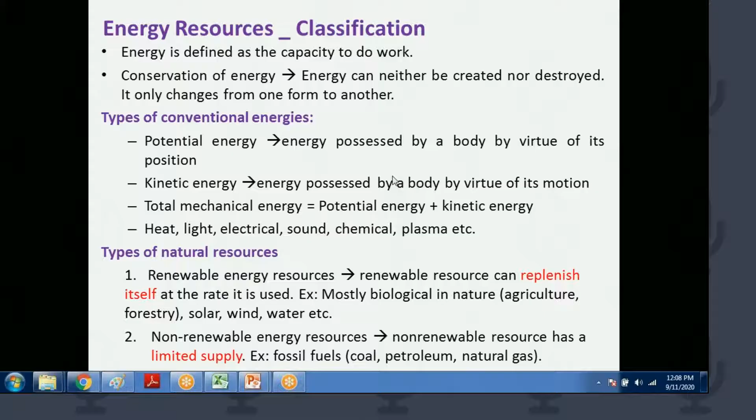Good afternoon for the second session of FDP. You have already listened to many talks, especially on alternate fuels, biodiesel and its production, and the chemistry involved in biodiesel production. Today morning we also heard about the techno-economic scenario of the biodiesel industry. Well-reputed experts from all over India, from reputed organizations like NIT and IIT, have been taking sessions in this FDP. So my topic is not different from them, but we are going to see a brief review about the scenario of renewable energy sources in this session.

We know that time is running out, and soon we'll come to know that there will be nothing left on earth to burn to produce energy, and only earth will be left. That will be the case in future if you don't opt for renewable energy sources.

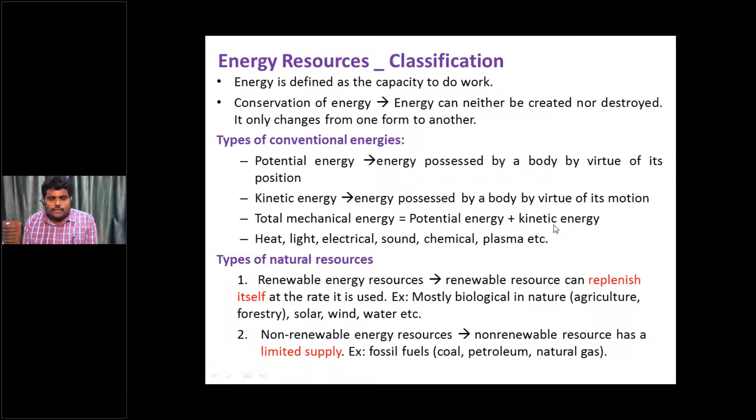So what are the non-renewable energy resources? They are very limited, and these fuels are going to an end—fossil fuels, for example, crude, petroleum, natural gas, diesel, etc.

What are the non-renewable natural resources? We can see gold and tin, that is metallic minerals; non-metallic minerals like salt, phosphate, stone; and fossil fuels like coal, oil, natural gases. These are the non-renewable natural resources from where we get non-renewable energy.

Whereas renewable energy resources we get directly from solar energy, winds, tides, flowing water, fertile soil—that is geothermal energy—and clean air, fresh water, and biological diversity from forests, food crops, fishes, etc., as we have been studying about biodiversity.

So where do we get these sources of energy? Fossil fuels mostly we get under the ground, as we already know: coal, oil, natural gas, etc. Mostly non-fossil fuels are seen above the ground, like firewood, cattle dung from vegetable waste, wood, charcoal, etc. These are examples of conventional renewable energy. So we all, as faculty members, know about what are the non-conventional energies.

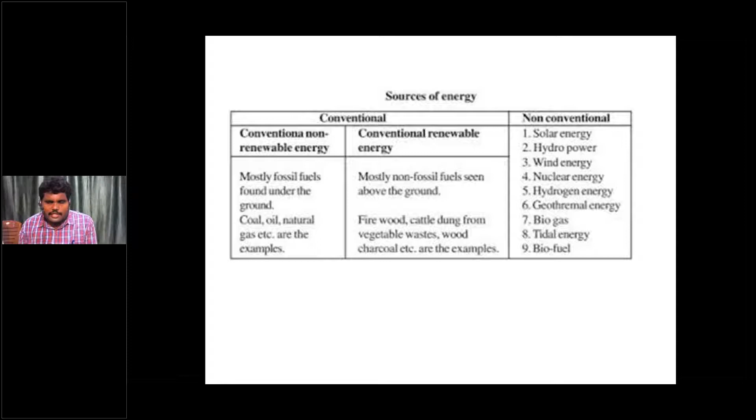I have already explained solar, hydro, wind, nuclear energy, hydrogen energy, geothermal energy, biogas, tidal energy, as well as biofuel. So we know in wind energy, what will happen?

Wind at a speed of about 5 to 10 meters per second can be converted to electrical energy by attaching a wind electric generator to the axle of the windmill. We might have seen windmills in various places. So wind energy can be generated through the electric generator from the windmill.

And tidal energy: the gravitational pull of the sun and the moon, along with the west to east rotation of the earth, causes tides. We know the energy produced due to the tides. The greater the difference between high and low tides, the more energy that can be harvested.

Another type of energy is ocean thermal energy conversion. It is the temperature difference existing between the warm surface of the sea water, that is 29 to 30 degrees, and the cold deep sea water, that is 5 to 7 degrees. Due to this temperature difference, available at 800 to 1,000 meters in tropical waters, ocean thermal energy can be produced.

Another one is wind wave energy. It is the incessant motion of the sea surface in the form of wind waves, provided as a source of energy. This is more efficient than the direct collection of energy from the wind, because a multi-purpose wave regulator system in the form of a long barrier constructed on the Indian coastline helps in harnessing this energy.

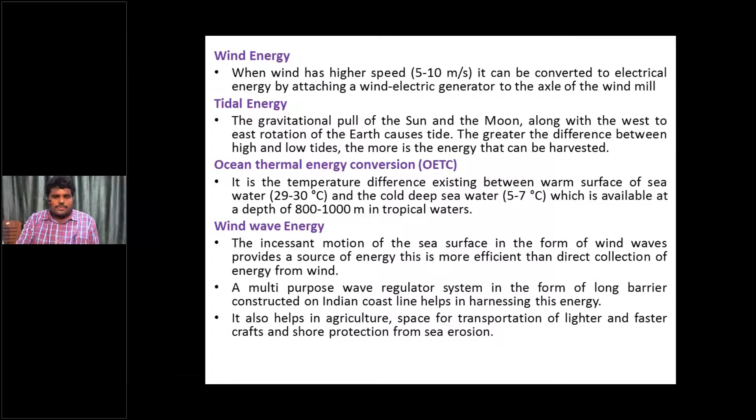It also helps in agriculture, provides space for transportation of lighter and faster crafts, and shore protection. So you all know about geothermal energy, hydel energy, and biomass, how they are produced, so I don't want to discuss much about this. This is only before we discuss the current scenario of renewable energy in India.

Now I would like to tell you what is the need of renewable energy. Actually, energy is the prime source of the economy, and of social and industrial development of a country.

If you see developed countries like the USA and others, their development is based on energy sources only. And not only that, if you see the world, day by day energy consumption is increasing more and more.

Still, 70% of the world's electricity generation depends upon thermal generation. Even though we have so many available natural resources, we are still able to generate 70% of electricity from thermal industry only. So therefore, there are so many social and economic issues with the conventional plants, as we all know.

So now the world is looking at sustainable development in the power sector, and this is the reason renewable energy has taken its birth into the power sector. Because daily the population is increasing, meaning more energy consumption is required, and it also depends on the economy. So for development, all these things are needed.

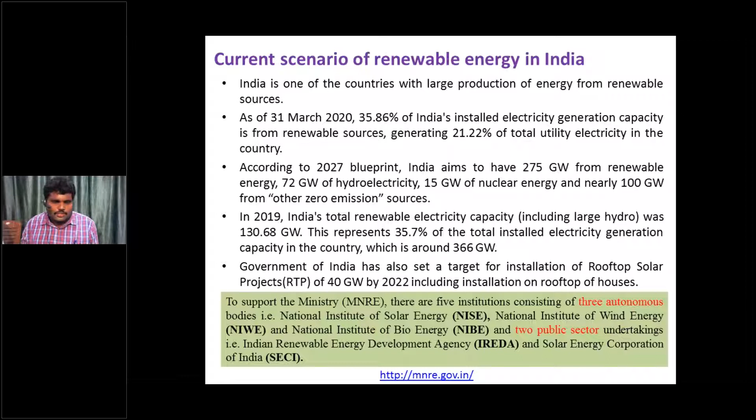In 2019, India's total renewable electricity capacity, including large hydro, was 130.68 gigawatts. This represents 35.7% of the total installed electricity capacity in the country, which is around 366 gigawatts. The Government of India has set a target for installation of rooftop solar projects of 40 gigawatts by 2022, including rooftop installation on houses. So this is the scenario of renewable energy in India.

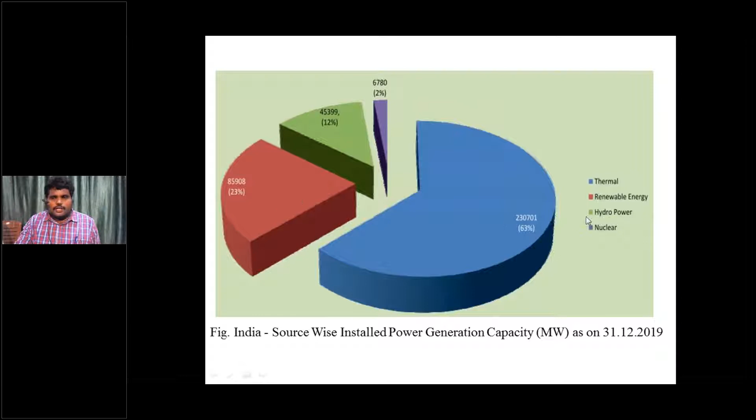We can see here India's source-wise installed power generation capacity as on 31 December 2019. The blue portion is thermal energy at 63%, renewable energy is 23%, hydropower is 12%, and nuclear energy is 2%. That is the scenario.

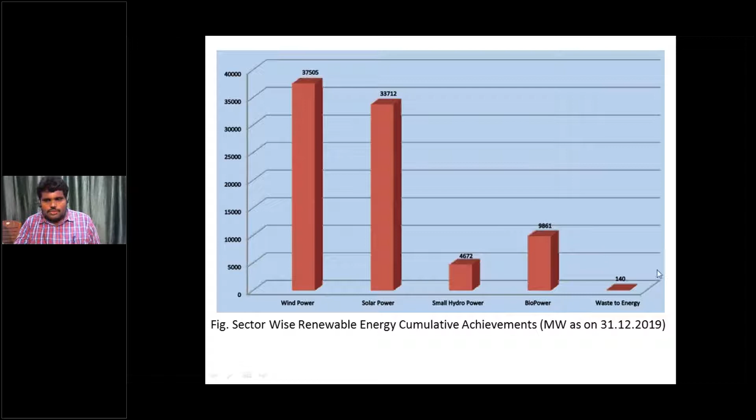Now if we compare the renewable energy scenario in terms of megawatts, sector-wise renewable energy, from this graph we can understand wind power, solar power at 33,712, small hydro power, and waste to energy.

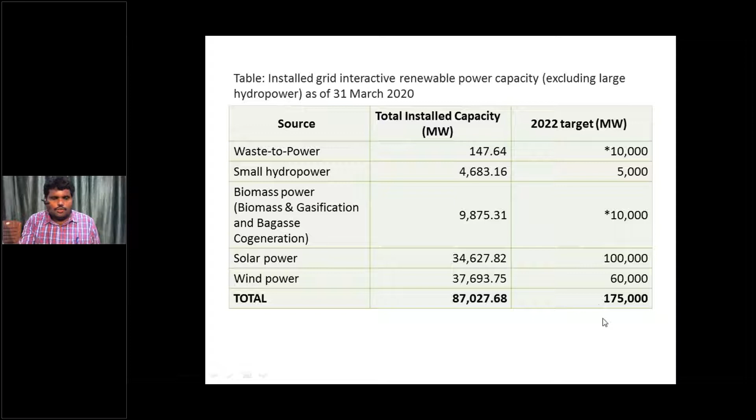This is the year-wise renewable energy generation scenario. We can see large hydro, small hydro, solar, wind, and power utility generation.

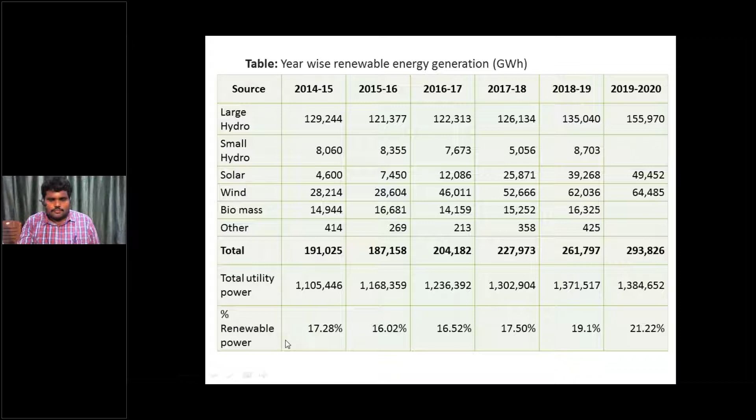Solar energy: India is densely populated and has high solar insolation, an ideal combination for using solar power in India. In 2009, the Government of India announced it would launch the Jawaharlal Nehru National Solar Mission under the National Action Plan on Climate Change.

The program was inaugurated by former Prime Minister Manmohan Singh on 11 January 2010 with the target of 20 gigawatts grid capacity by 2022, as well as 2 gigawatts of off-grid installation. This target was later increased to 100 gigawatts by the same date under the Narendra Modi government, reflected in the Union Budget of India as well.

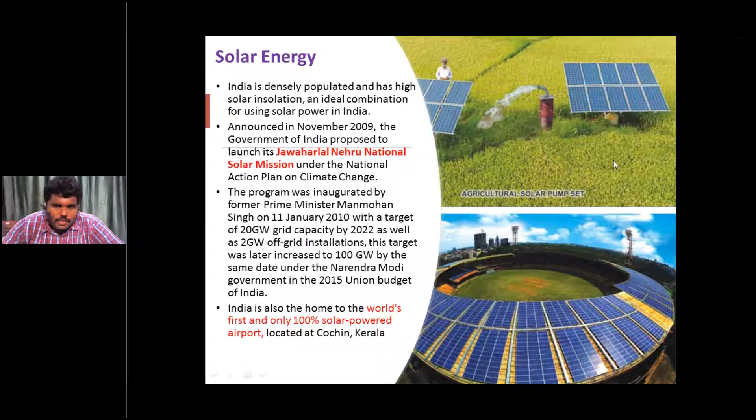India is also home to the world's first and only 100% solar-powered airport, located in Cochin, Kerala. This airport operates totally on solar energy, and the agricultural pump sets there are also totally operated by solar panels.

Next, ethanol. Ethanol market penetration reached its highest figure of 3.3% blend rate in India in 2016. It is produced from sugarcane molasses and partly from grains, and can be blended with gasoline. Sugarcane and sugarcane juice may not be used for ethanol production in India. The government is also encouraging 2G ethanol commercial production using biomass as feedstock.

Biodiesel: the market for biodiesel remains at an early stage in India, with the country achieving a minimal blend rate with diesel of 0.001% still in 2016. Initially, development focused on the Jatropha curcas plant as the most suitable inedible oil seed for biodiesel. Jatropha seeds biodiesel has already been covered in so many sessions by experts.

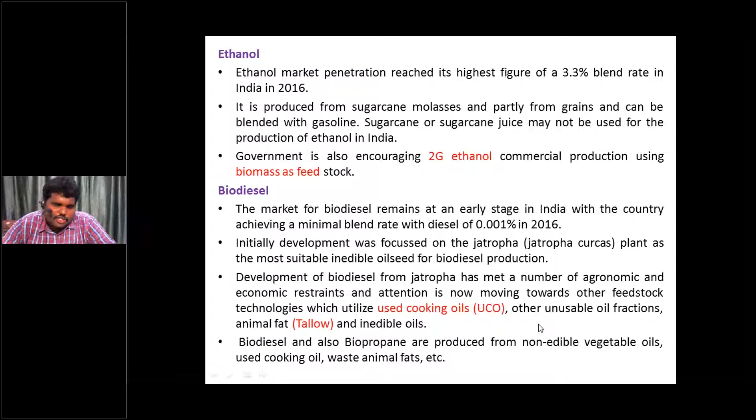Development of biodiesel from Jatropha has met a number of agronomic and economic constraints, and attention is now moving toward other feedstock technologies utilizing used cooking oils, other unusable oil fractions, animal fats, and inedible oils. This morning sir was telling us the cost of biodiesel is very high compared to normal diesel, so they're trying other options like used cooking oils and unusable fractions. Biodiesel and biopropane are produced from non-edible vegetable oils, used cooking oil, waste animal fats, etc.

Biomass: the country's vast agricultural potential provides huge agro residues which can be used to meet energy needs in both heat and power applications. According to IREDA, biomass is capable of supplementing coal to the tune of about 260 million tons, saving about 250 billion every year. It is estimated that the potential for biomass energy in India includes 16,000 megawatts from biomass energy and a further 3,500 megawatts from bagasse cogeneration.

Biomass materials that can be used for power generation include bagasse, rice husk, straw, cotton stalk, coconut shells, soya husk, de-oiled cakes, coffee waste, jute waste, groundnut shells, and sawdust.

This is the agriculture residue generated every year in million tons. Straws of various pulses and cereals generate this much, bagasse this much, rice husk about 10 million tons per annum, groundnut shell 11.10 tons per annum, stalks 2 tons per annum, and various oil stalks and others. About 350 million tons are produced by agricultural residues in total.

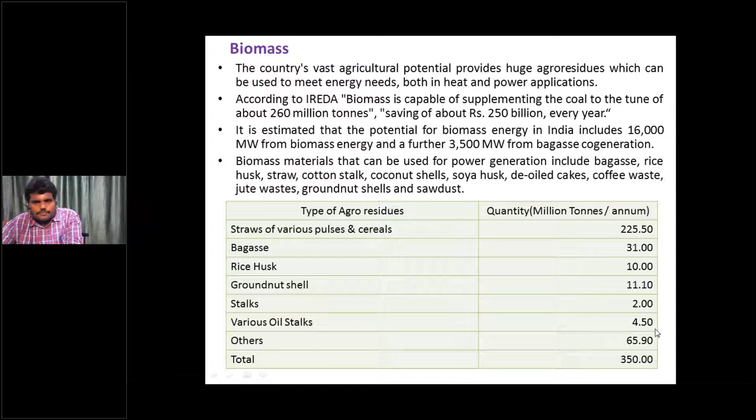Yesterday, Chintala sir covered especially waste-to-energy from plastic, how to convert wastage of plastic bottles and such. Every year about 55 million tons of municipal solid waste and 38 billion liters of sewage are generated in the urban areas of India.

In addition, large quantities of solid and liquid waste are generated by industries. Burning waste in waste-to-energy plants not only reduces its volume by 87%, but also lets us harness its embedded energy and put it to good use. So much energy can be produced even with the help of waste plastics.

Worldwide, 130 million tons of municipal solid waste are combusted annually in over 600 waste-to-energy facilities that produce electricity and steam for district heating, and recover metals for recycling.

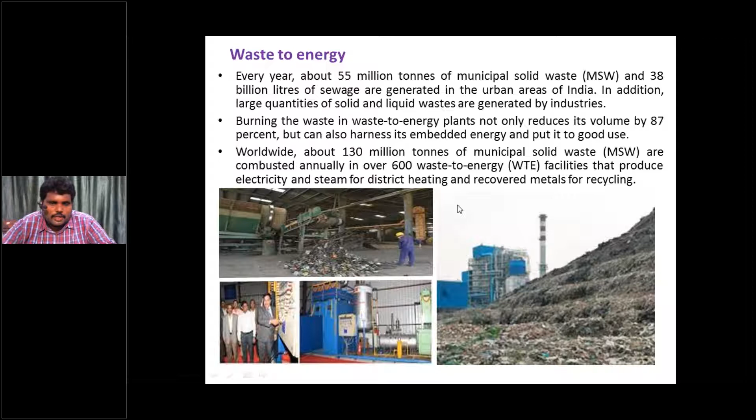India is the first country in the world to set up a Ministry of Non-Conventional Energy Resources, the Ministry of New and Renewable Energy, MNRE, in the early 1980s. India is fifth in global position for overall installed renewable energy capacity.

We can see a record low solar tariff of 2.44 rupees per unit achieved in Bhadla, Rajasthan. Renewable energy installed capacity increased 226% in the last 5 years. The solar park scheme doubled from 20 gigawatts to 40 gigawatts, with about 19 times higher solar pumps installed between 2014 to 2019. These are the achievements in the renewable energy sector in India.

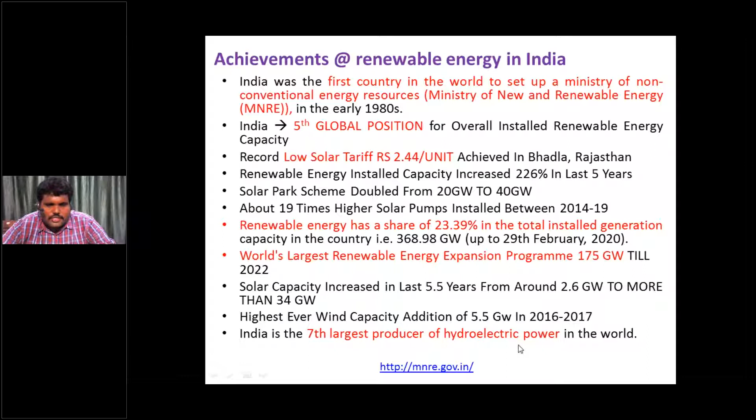It's the world's largest renewable energy expansion program, targeting 175 gigawatts by 2022. Solar capacity increased in the last 5 years from around 2.6 gigawatts to more than 34 gigawatts. There was the highest ever wind capacity addition of 5.5 gigawatts in 2016 to 2017. India is the 7th largest producer of hydroelectric power in the world.

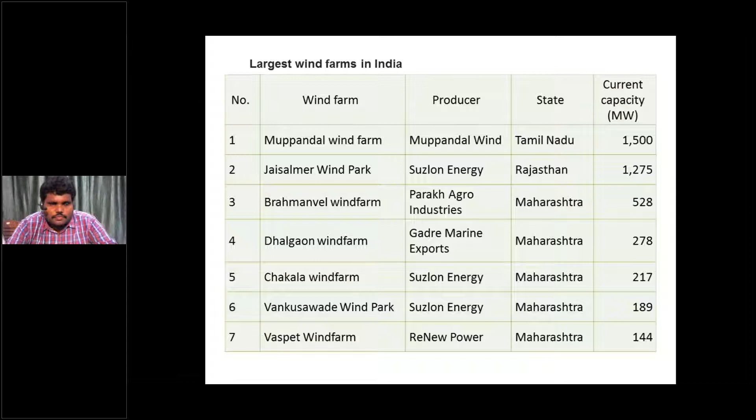So this is a little brief review about renewable energy resources that we can see.

Why do we need renewable energy resources? Mainly, we can see they are clean, inexhaustible and increasingly competitive energy sources. That is why we go for this.

We see that a lot of climate change is coming, so much pollution. If we have these renewable energy sources, then we will be free from the problems of fossil fuels, and those energy resources can be recovered with the help of renewable resources.

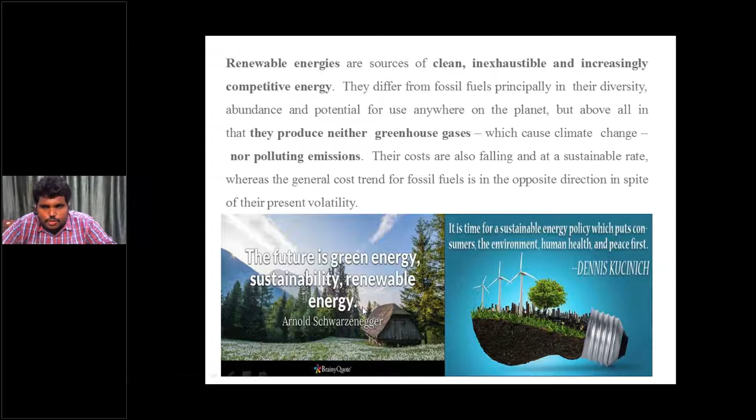Somebody said now the future is green energy, sustainability, renewable energy. The future is like that. So it is the time for a sustainable energy policy which puts consumers, the environment, and human health first, and we have to consider a lot of these things.

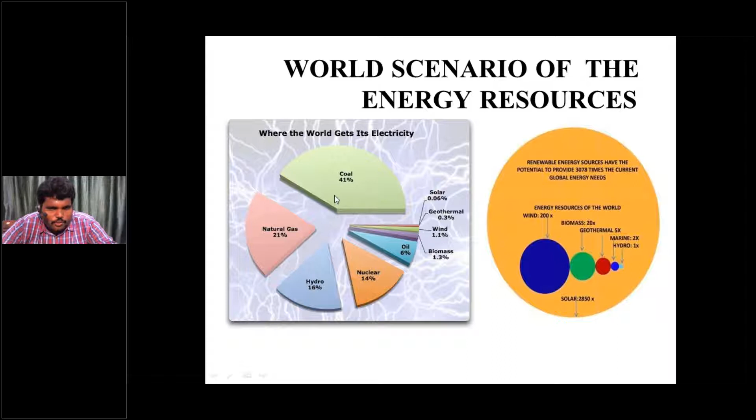This is the scenario I was telling about, the world energy scenario. We can see solar energy, geothermal, wind, biomass, and oil, nuclear, hydro, natural gas, and coal resources. This is the scenario, as already explained.

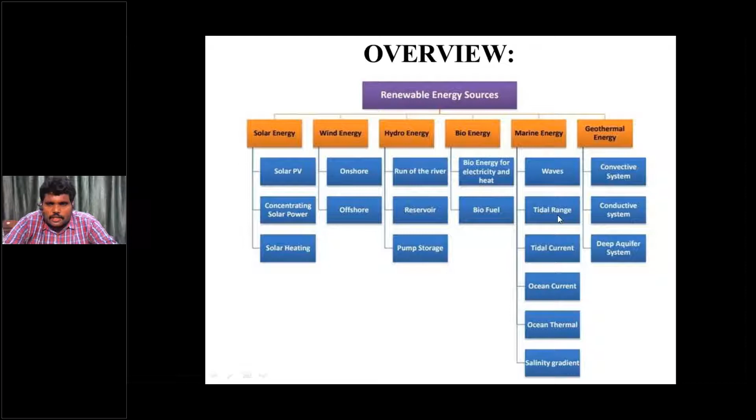So renewable energy sources include solar energy, where we use solar PV cells, concentrating solar power, and solar heating; wind energy and its requirements; hydro energy and its requirements; bioenergy and its requirements; and also marine energy and geothermal energy. All these things are there, and since most participants are from a thermal background, you are already well aware of this.

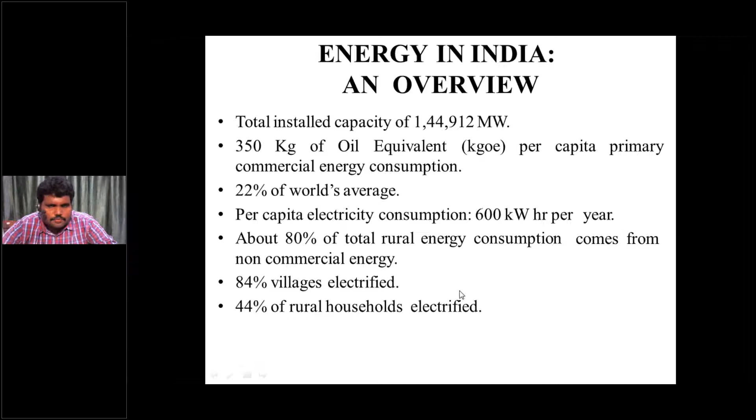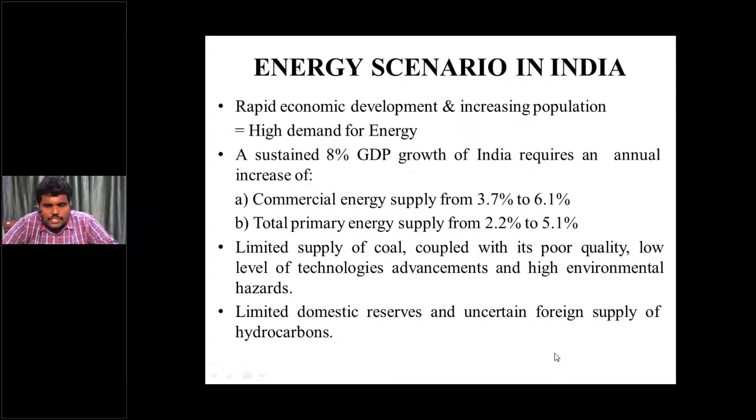But the problem is we have a limited supply of coal, and that too is of poor quality. So we need higher technologies to develop renewable resources so that we can be free from high environmental hazards, along with limited domestic reserves and uncertain supply of hydrocarbons. This is the India power sector that I've already explained.

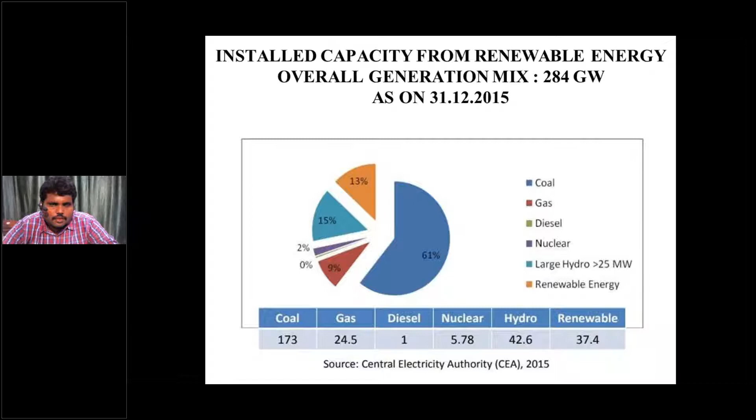Installed capacity from renewables and the overall generation mix. Reasons include power shortage, rising prices of oil and gas, ecological hazards, ample resources and sites available, abundant sunshine, government incentives, and increasing finance.

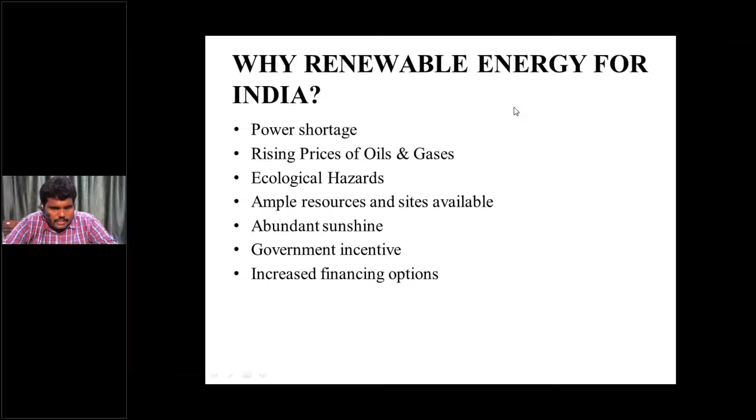These are the reasons why we go for the renewable energy sector, which we already know. There is nothing new in this. So what are the benefits?

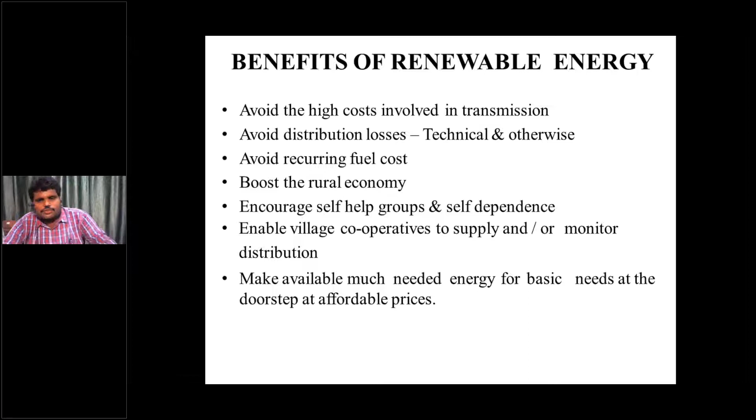We can avoid costs, avoid distribution losses and recurring fuel costs, and it will boost the rural economy. It also encourages self-help groups, self-dependence, and enables village cooperatives to supply and monitor distribution. All these advantages are there.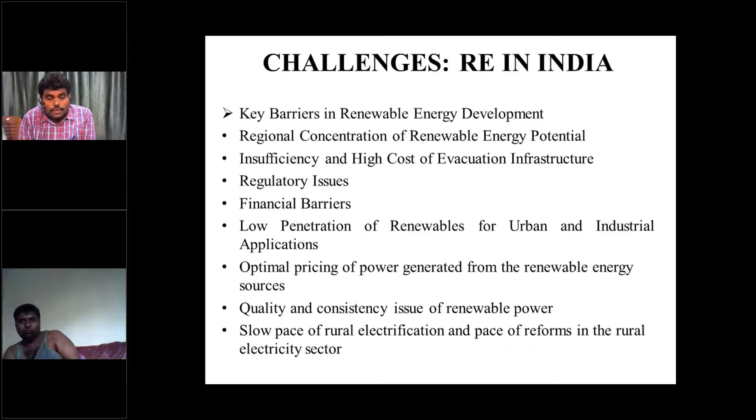Cost is very high, and there are regulatory issues and financial barriers, quality and consistency issues, and low penetration of renewables for urban and industrial application, along with a slow pace of rural electrification and pace of reforms. These are the challenges for developing renewable energy.

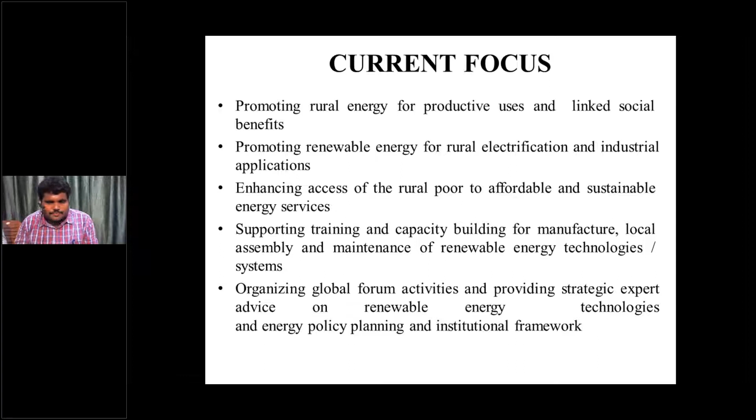The current focus is on promoting rural energy for productive uses and linked social benefits, promoting renewable energy for rural electrification and industrial applications, supporting training and capacity building for manufacturing and local assembly and maintenance of renewable energy technologies, organizing global forum activities, and providing strategic expert advice on renewable energy technologies. These are the areas for renewable energy development.

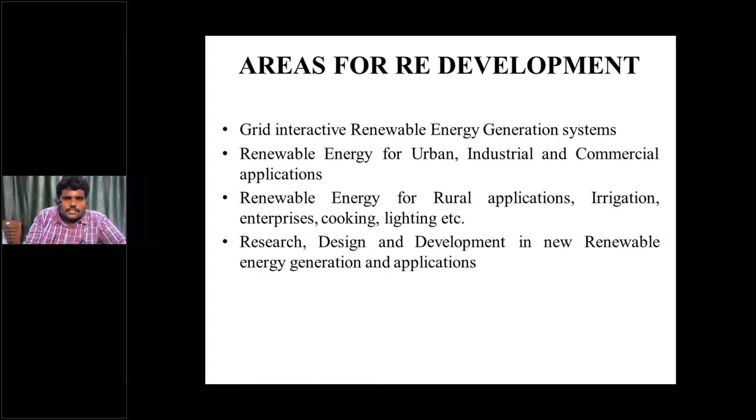You can see research, design, and development of new renewable energy, rural renewable energy required for rural application, irrigation enterprises, etc. So therefore, there is an urgent need for transition from petroleum-based energy system to one based on renewable energy sources to decrease reliance on depleting reserves of fossil fuels and to mitigate climate change. We need to protect climate also. It has potential to create employment opportunities also at various levels.

India has a huge potential of renewable energy sources, and from past few years, due to government involvement, there is sudden growth in the renewable sector. Prospects of renewable energy are steadily improving in India with a better future. So the strategy for achieving these enhanced goals will mainly depend on the active participation of all players, from government agencies to NGOs, from manufacturers to R&D institutions, from financial institutions to developers, and of course a new breed of energy entrepreneurs.

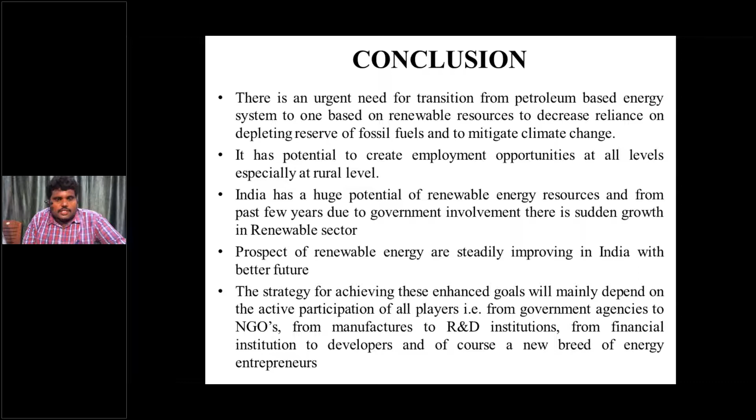So these are just a brief review about the renewable energy scenario in India. You can see various renewable energy scope - what is the scope of renewable energy, why it is needed, what are the challenges - all that I have covered. We are all experts in this field, and since you are from a thermal engineering background, you know very well about alternate fuels, and you can also discuss the renewable energy scenario in India and suggest points on this platform. So that is about this topic.